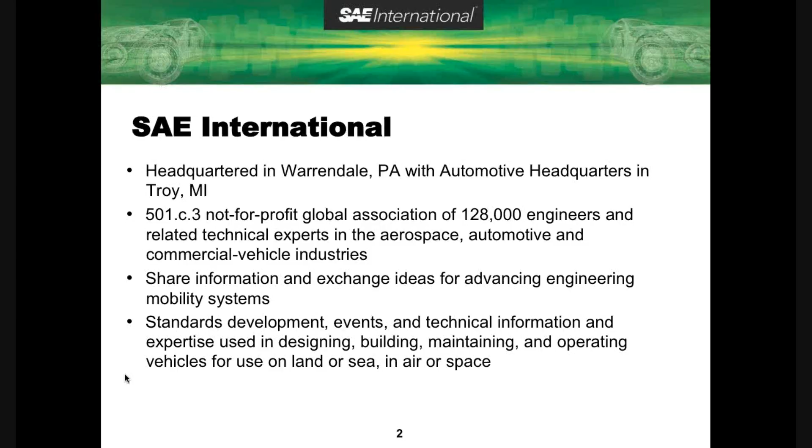SAE has automotive headquarters in Troy, Michigan, in close proximity to the major auto sector. It's a 501c3 not-for-profit global association of 128,000 engineers and related technical experts in the aerospace, automotive, and commercial vehicle industries. It's over 100 years old as a society. Its purpose is to share information and exchange ideas for advancing engineering and mobility systems. If you aren't familiar with the term mobility systems, it really encompasses everything that moves, except railroads. SAE is concerned with standards development, events, technical information, and expertise used in designing, building, maintaining, and operating vehicles for use on land or sea, in air or space. Railroads are the only thing I can think of that they do not cover.

So today, I want to give you an overview of how we got into some of these issues for green chemistry and engineering and sustainability. SAE has a vision for 2020 that I'll describe for you. Many of you may be very familiar with the Michigan Green Chemistry Initiatives, and I wanted to describe what SAE's response to that was - it's really engaged quite a bit. I'll describe the Green Technology Steering Committee, give you some examples of green chemistry projects that really do subscribe to the green chemistry principles in the automotive sector. I'll talk a little bit about bio-based materials in the auto industry, because I think the auto industry is really at the forefront of the use of such materials, and that may be a surprise to people - it was a surprise to me about the extent that bio-based materials are being used. And then SAE has actually had a concept of green car factors that might be used to look at cars in a slightly different way as it relates to sustainable mobility, and then I'll share some lessons learned and future steps that SAE has learned along the way.

So SAE's vision for 2020 is to be #1 in the mobility industry by connecting a global network of students, engineers, practitioners, and companies, attracting, managing, and distributing mobility-related information through education, standards, and technical publications. SAE has probably over 10,000 standards, and I'm not quite sure how many documents, but it is really quite an amazing collection of technical information that I found the health and environmental community is probably not so familiar with. Not that this is for engineers, but there really is quite a resource here that is important to understand. SAE wants to be leading in global standardization.

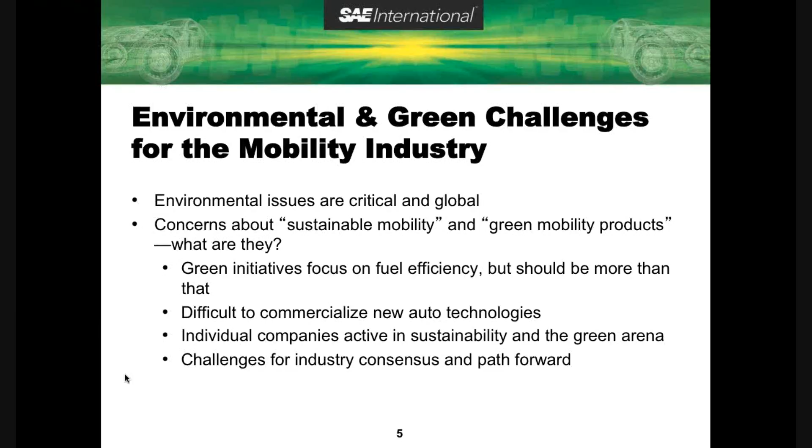SAE's proposed actions for the mobility industry in this context is to provide technical information and feedback to address the issues before regulations are imposed. This is a very regulated industry, and so if progress can be made in some of these sustainability arenas without regulations, the industry would welcome that.

They would like to make the mobility sector part of the solution and to facilitate industry's approach to be more environmentally responsive, yet cost-effective and time-sensitive, and we'll get back to that issue frequently. The last thing SAE would like is to make sure that the mobility sector is recognized as a leader for new green and sustainable technology.

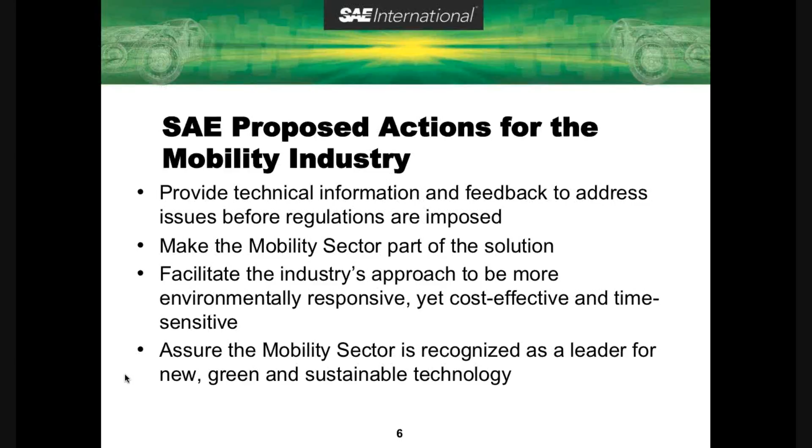I thought a little background on transportation might be instructive. This information has been drawn from the U.S. Energy Information and the World Resources Institute. Almost 20% of the world's total delivered energy is used in the transportation sector. It accounts for more than 50% of world consumption of liquid fuels, and 14% of greenhouse gases worldwide originate from the transportation sector, making it about the 3rd largest emission source.

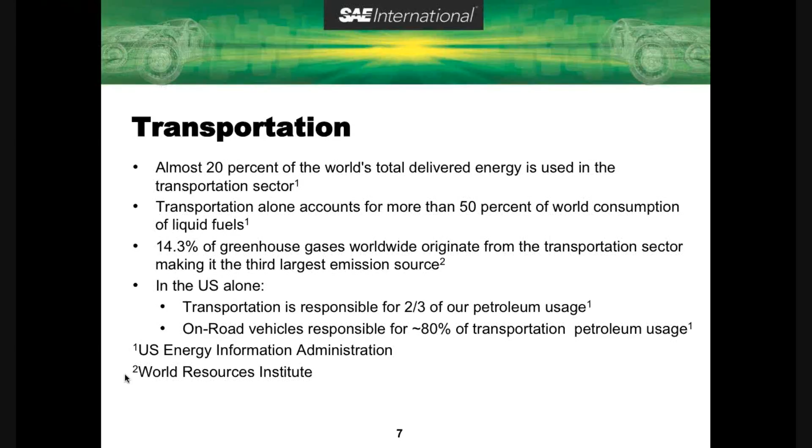In the U.S. alone, reflecting our very large number of vehicles, transportation is responsible for 2/3 of our petroleum usage, and on-road vehicles are responsible for about 80% of the transportation petroleum usage. So clearly, autos and transportation and on-road vehicles are a very important sector as we look at the future for sustainability. There are trends in the auto industry that recognize some of these issues.

Lightweighting is a term being used in the industry to find materials that reduce the mass and weight of a vehicle. But one of the points about lightweighting is the materials still have to maintain safety. The safety issues are really paramount.

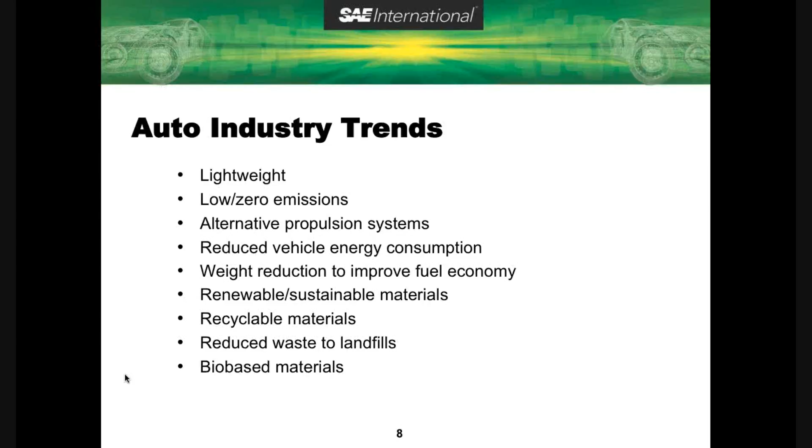There's a trend toward low and zero emissions, alternative propulsion systems, reduced vehicle energy consumption, and again, weight reduction to improve fuel economy, increased use of renewable and sustainable materials, recyclable materials, reduced waste to landfills, and bio-based materials. These last items we'll talk about a little bit more.

Another fact that's not well known outside the industry is the extent of recycling. The automobile is one of the most recycled consumer products on the face of the planet. In North America, 95% of retired autos are processed for recycling every year.

This can compare now. Clearly, we have to pick our databases, but appliances are recycled at about a rate of 67%, paper at 50%, aluminum cans at 45%, and soft drink bottles at 34%. So clearly the automotive industry has figured out recycling.

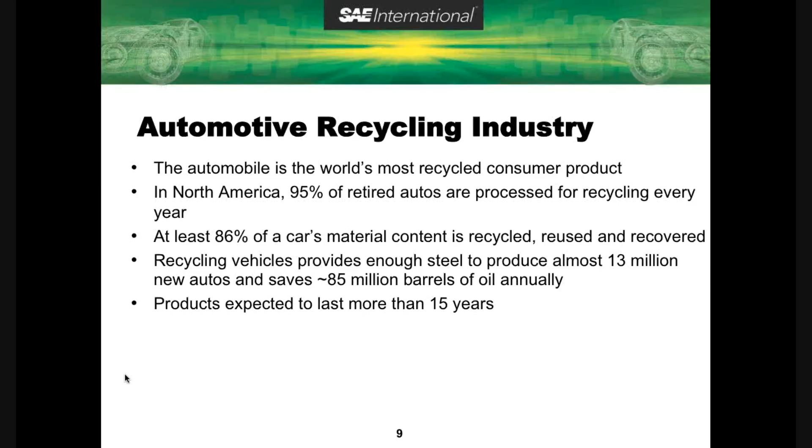The observation is that recycling vehicles provides enough steel to produce almost 13 million new autos and saves 85 million barrels of oil annually. These are on products that are expected to last more than 15 years.

With that introduction and a little background, I thought I would describe how SAE became involved with green chemistry activities in Michigan. Many of you are familiar with the 2006 Michigan Executive Directive by Governor Granholm. Subsequently, an action plan was developed for Michigan Green Chemistry Research, Development, and Education. And in 2009, the Michigan Department of Environmental Quality, with support from the Michigan Green Chemistry Roundtable, awarded a grant for a workshop to SAE.

The title of this was the feasibility study for establishing a center for green innovation and technology transfer for the automotive industry in Michigan. At the time, there was some thought that if a center were established, some of these issues of technology transfer and the long lead time it takes for technologies to penetrate into the industry might be reduced.

That still might be the case, but there are clearly a lot of issues around establishing a center, not the least of which was who was going to pay for it.

So there were three significant observations from this workshop: one, that a center could be a means to achieve the goals for green innovation. Second, that other approaches to achieve the goal through leveraging other resources, organizations, or existing centers would be possible. And third, that a network of interested individuals and practitioners could be established to further explore and refine these issues and concepts.

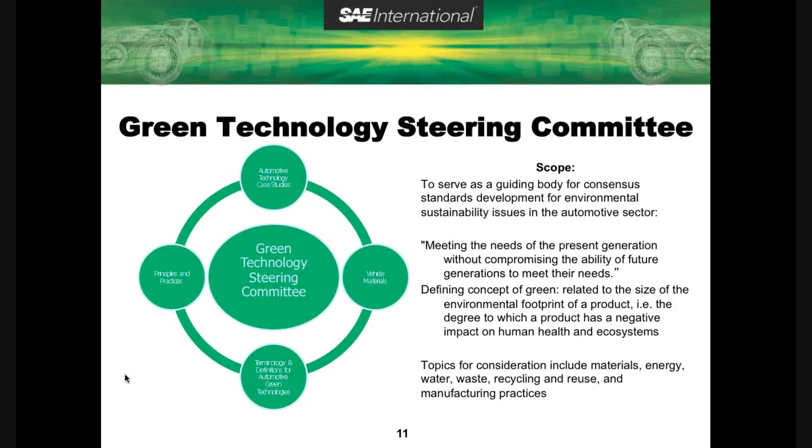So the work in progress by this committee: implementation of green chemistry and engineering within the automotive sector. This is a document that's under development. We have the glossary of terms in use in green innovation and sustainable practices in the automotive industry, which is under development, and we are optimistic we'll release that in the summer of 2012.

We maintain an inventory of green chemistry and engineering case studies from EPA awards. There are a number of not only applicants but some awardees for the U.S. Green Chemistry program that are associated with the auto industry. I'll talk to you a little bit about the bio-based materials workshop that we held in 2011. We're exploring a landfill-free attainment best practices project, which is just getting underway—we're just in the concept stage.

And then the other work in progress is we have ongoing discussion forums on topics of interest raised by the members.

So examples of green chemistry and engineering projects in the auto sector. I've just selected some examples that support a few of the principles of green chemistry. This is not in any means comprehensive, nor can I necessarily find examples where green chemistry principles have been systematically applied, but they certainly are in application right now.

So in preventing waste, this is an example from GM—I think other companies probably have similar examples. In the landfill arena, since 2005, 78 of the 156 global manufacturing facilities, as well as 14 non-manufacturing operations, are landfill-free at GM. In terms of waste, since 2000, there's been a 43% decrease in waste, with 91% of all waste recycled at GM. And I've been encouraging GM to talk about this in a larger audience, because I think there are lessons that they've learned that could be shared across several industry sectors.

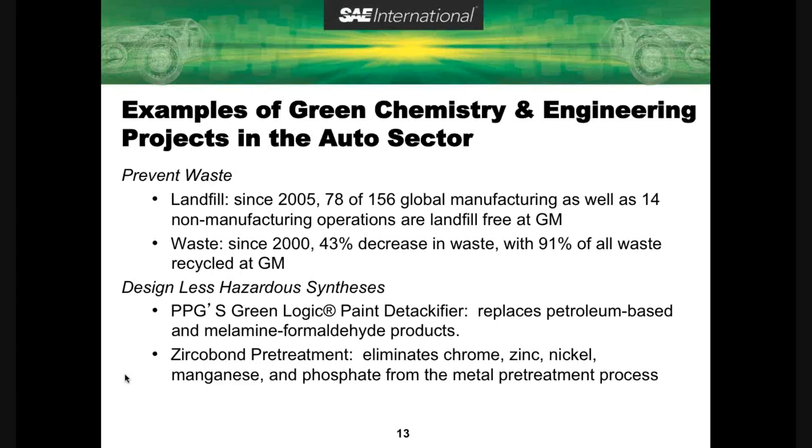The second set of examples is the use of renewable feedstocks, and I'm going to focus on biomaterials and autos for the next several slides.

With the original equipment manufacturers, so-called OEMs, which are the big manufacturers like Ford, GM, Toyota, have Tier 1 suppliers, and their Tier 1 suppliers have been really looking at biopolymers to replace existing petroleum-based resins. There are bio-based resins made from corn, castor beans, sugar cane, and soy, with soy oil being very predominant across the industry for use in foams, thermoset resins, and fillers.

There are fillers and reinforcements also made from soy and wood flour to reduce density of the products or components in the car. There are natural fibers using hemp, switchgrass, flax, wheat straw, wood, kenaf, and coconut for thermosets and thermoplastics. In some cases, these are mixed with petroleum products, but they've really reduced the extent of petroleum product use.

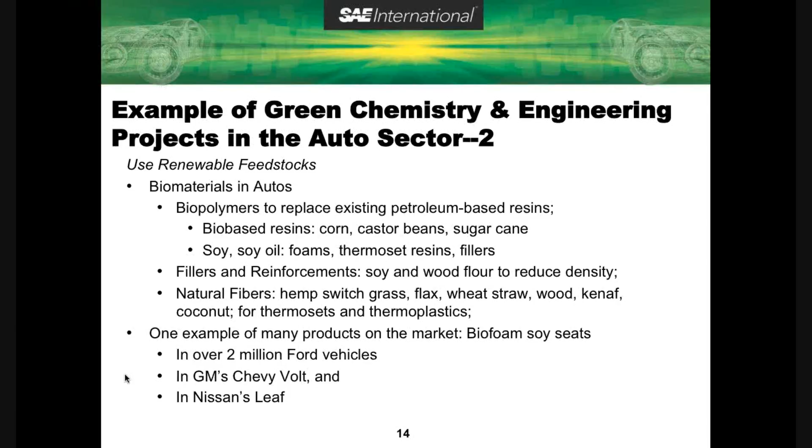One example of the many products on the market is the biofoam soy seats. I haven't been able to document the full extent of this, but they're certainly in over 2 million Ford vehicles across 23 platforms in the Ford line. GM's Chevy Volt and Nissan's Leaf also use soy seats, and it's probably extensively used across the industry, but so far there has not been an inventory of these products.

So with the extent of bio-based materials in the industry, there's something called the USDA BioPreferred Program, which is a labeling and preferred purchasing program for the U.S. government to encourage the use and purchase of bio-based products. This program is authorized by the 2008 Farm Bill. If this program achieves its purpose, it's expected to decrease petroleum consumption, increase use of renewables, and better manage the carbon cycle, and it may contribute to decreasing adverse environmental and health impacts.

In this legislation, automobiles were designated as complex assemblies, but autos cannot participate in this program at this time until a method for determining bio-based content has been established for such complex assemblies. This is a very different issue than trying to establish bio-based content for a simple product, such as a cleaning product.

When we became aware of this program, the committee did, and SAE organized a workshop in 2011. The purpose of the workshop really was to have a dialogue with USDA and the auto industry, so that USDA could better understand what the business case already has been for establishing bio-based products, and then to discuss what the extent of the program might be with this bio-preferred program.

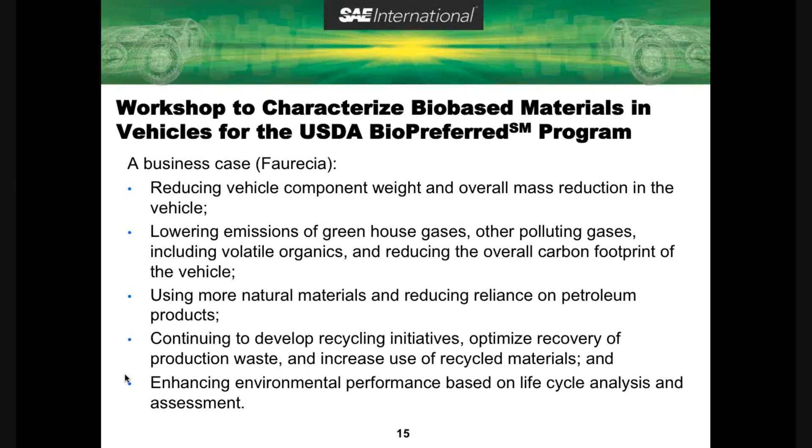So it became clear during the workshop that there are some elements that all the automotive manufacturers and Tier 1 suppliers must consider. Here are six of the elements that have to be considered regardless of where the materials come from. Cost is the driver—there needs to be cost-effective material. It has to be priced at or lower than petroleum-based products, or it will not get used. The auto industry is incredibly competitive on cost.

Consumers react to that, so this is an issue for all of us. Second is performance and quality as it relates to safety concern. As I mentioned earlier, these products are considered to be in use for 15 years, so performance and quality has to be maintained for quite a long time. The third issue is mass reduction—how are you going to minimize mass to maximize fuel efficiency, since that is a driver and a competitive issue?

And then to reduce environmental impacts, that can really be under the control of the auto industry from cradle to gate material manufacturing. There'll be global and regional availability factors for source materials that are quite different depending on your geographic location. And lastly, the infrastructure for any material has to be available so that it doesn't have to be rebuilt or invented.

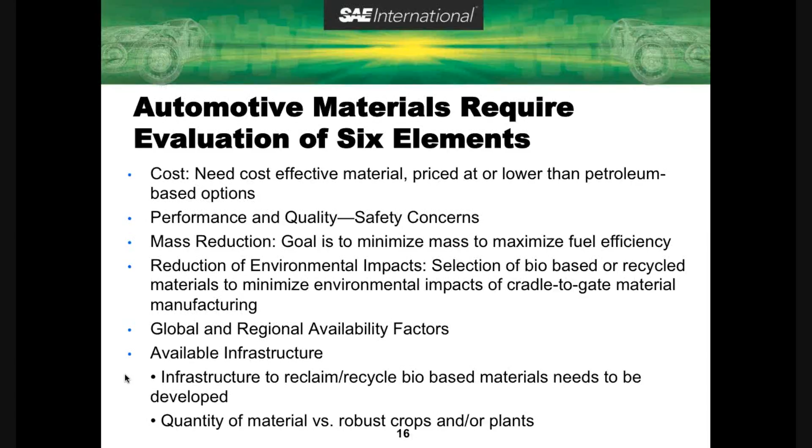That makes it have to be a seamless integration if new materials are being introduced. That's going to be a particular issue to reclaim and recycle bio-based materials in the current structures. There's also an issue of the quantity of material needed. If you're trying to supply materials for the auto industry, you need a very large supply chain, and there are concerns about how robust the crops or plants are and what market you might be competing against for use of these materials. So those were six elements that have to be considered regardless of where the material is coming from.

Part of the issue identified in the bio-preferred program by the auto industry was how will performance and safety criteria be incorporated into the program requirements if autos are to compete? How will the increased costs of measurement and validation be factored in? How will the business case and market for current bio-based materials in vehicles change, given rapid changes going on, and would the USDA program be able to incorporate those changes?

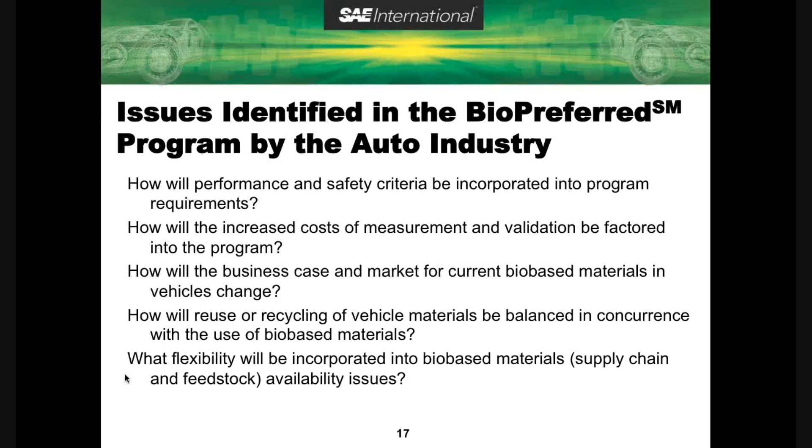The other issue is how will reuse or recycling of vehicle materials be balanced with the use of bio-based materials, and what flexibility will be incorporated into the bio-based materials supply chain and feedstock if a bio-based feedstock is suddenly no longer available? What happens next? The production chain generally can't stop. These are issues under continued discussion with USDA, and we'll see where those go.

As I mentioned, there are elements in a green car factor that might be very interesting for best practices or standards for sustainability. These are suggestions from SAE, not agreed to by any means. I don't want to suggest that's the case, but this is something being discussed. Whether we actually get to a best practice or standard, we may get to parts of these. That includes direct vehicle emissions, fuel energy source, and environmental impact.

What are the materials? I should point out, under refrigerants, there's a new refrigerant that will go into all cars. This has a tremendously different global warming potential than the current refrigerant, and it can be dropped in so it can be used in current cars and new cars, so there doesn't have to be a re-engineered system for the refrigerants and air conditioning.

This is a huge issue. It was actually driven by some of the regulations in Europe, but it's now a global thing. SAE has managed the cooperative research program for this alternative refrigerant, and it is now a standard. The U.S. government has recognized it as a standard in the Federal Register. So this is how some of these issues may develop, and SAE would like to play a role in assisting with those issues.

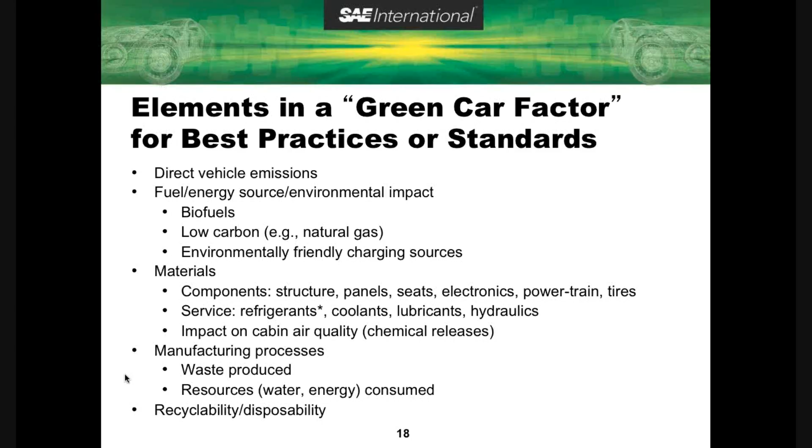The other areas in the element are in the manufacturing processes and then recyclability and disposal. These would be areas where there might be approaches to look for best practices or standards, and that's what the committee is trying to do.

This leads me to some of my final slides on sustainable mobility. The Auto Alliance is a trade association for the U.S.-based autos, and they have a fine small book called Reinventing the Automobile, which they put out last year, and I think there's a new one coming out. They define sustainable mobility as delivering safe, energy-efficient products that meet customers' needs while using the Earth's resources responsibly, minimizing environmental impacts, relying on renewable energy, and responding to different community needs for transportation, while fulfilling our fundamental role in driving world economies.

It depends on collaboration, with automakers working with government, energy providers, and consumers to advance sustainable mobility through a comprehensive integrated approach.

SAE's lessons learned to date are, at a fairly high level, that sustainability issues are cross-cutting across the companies. They're not required by regulation or law. So far they're voluntary, and not focused in discrete technical departments in the companies as yet. Companies address sustainability very differently, but all auto companies are working on it. Many have set up websites to communicate about their progress. There's no silver bullet of one or two activities—there's a wide variety of activities going on.